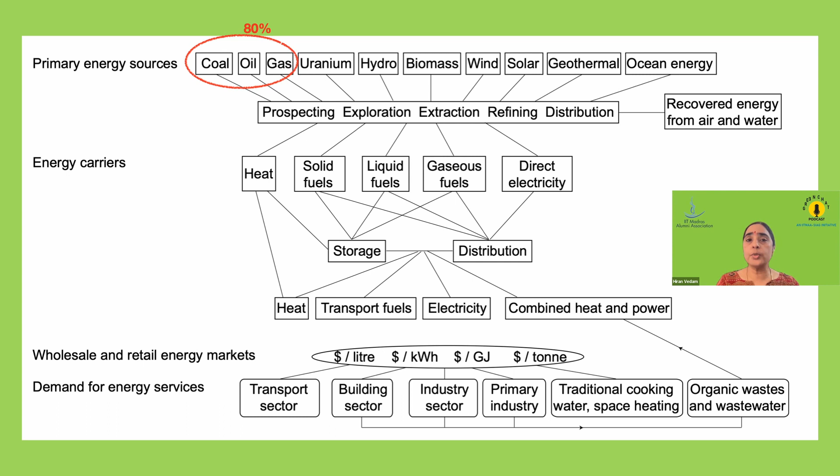So if you look at how this energy is distributed, 80% of the energy we use today comes from fossil fuels, and we touched upon it. We discussed it a lot in episode 2, and 6% of it is from biomass, directly the agricultural waste or plant waste and so on. And the rest of it, a very small portion of it, comes from solar and wind currently, but we hope this will grow for various reasons that will become apparent in this session as we go along.

And when we talk of energy, most people think about electricity, and most of the discussion around energy is around electricity, its transmission, its use, and so on. But it only contributes to 43% of our energy needs. The rest is gases, liquids, and solids like coal, gas, and oil, and also hydrogen kind of gases that we can store the primary energy and use it for later. Because it's easier to transport over pipelines, or we can store it for a long time without degradation and so on. That was good, Hiran.

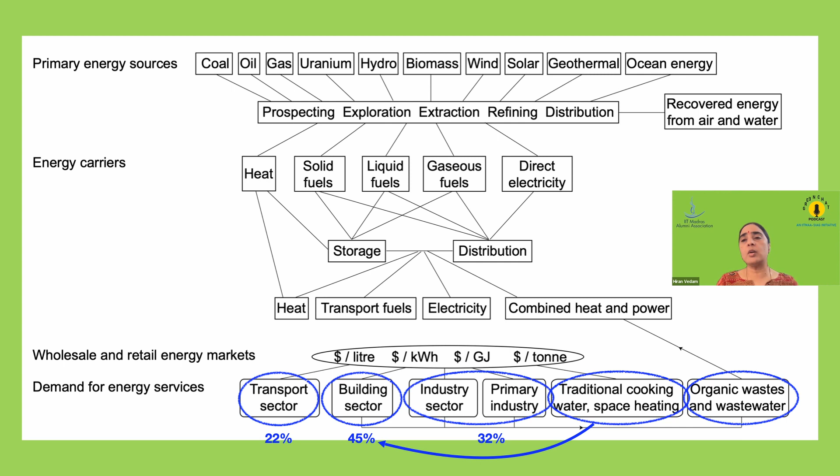What is the current and future demand of energy? If you look at the demand side of things, transportation, which includes your road, rail, your aviation, your seafaring vehicles, that accounts for about 22% of our energy use. Building sector, including our traditional cooking, space heating, and all of that, accounts for 45%. And the industry, including your waste treatment and all of that, accounts for 32% of it. So this is how the energy industry is structured overall.

And if you look at the primary consumption of energy world over, we are close to about 160 petawatt hours of energy that we use today. But it is expected to grow as GDP grows, in line with it. We expect it to grow at the 3 to 5% rate that we are seeing today.

Wonderful, Hiran. It's interesting to see that only 43% of energy is from electricity, and that's a big know-how that we have learned today. Now let's focus a little bit on what are the losses that are involved in every stage. You've mentioned all these phases. I'm sure there's energy losses across every phase. Let's talk about that. Sure.

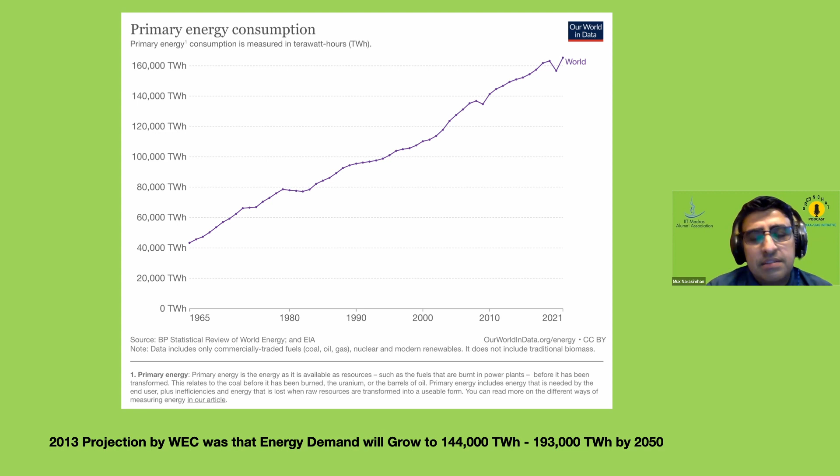As we all know, we need to convert energy from one form to another to use it, and we transmit energy from one point to another. So at every stage, when we are converting from primary to secondary, or whether you're transmitting it, or whether you're using it in a device, at each stage there are losses, inefficiencies in terms of transmission or transformation or in usage. So, for example, if we take coal, 1 unit of energy in coal, when it translates into the light in your light bulb, only 1.6% of that energy is actually generating that light. Everything else is lost either in transmission or in heating the bulb, so to speak.

So the useful energy is only 1.6%. That's extremely low. And not only that, if you look at the transmission losses, it accounts for more than 50% of the electricity generated. So you take coal, you convert it into electricity in your power plant. By the time it reaches your home, 50% of that energy is already lost.

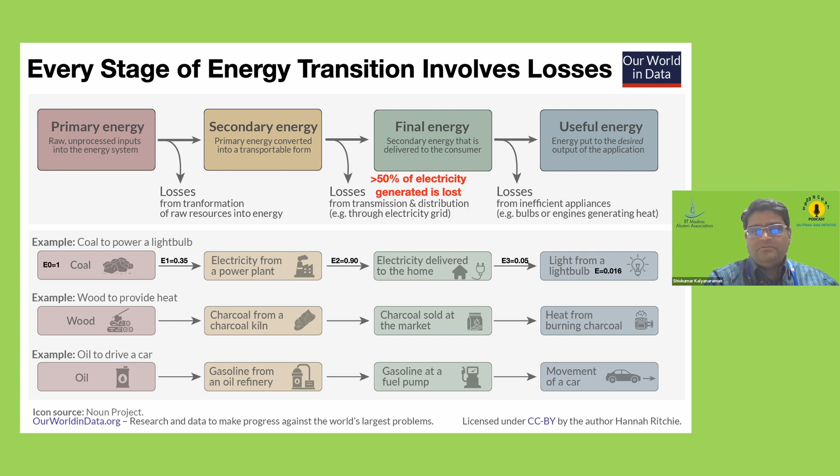So if you look at the technical loss versus commercial loss, I think you're including the commercial loss on this. The technical loss would be around 3.5-4% only, but the commercial loss is much higher. I agree with you. And is that an India phenomenon? No, this greater than 50% is actually a number from the global data from IEA. So this is not just an India phenomenon. You see that everywhere. Oh, okay. I was under the impression that 50% included the first set of losses primarily. So 50% is a big number. Yeah. And which is where, I guess, we'll be talking more about it in episode 5.

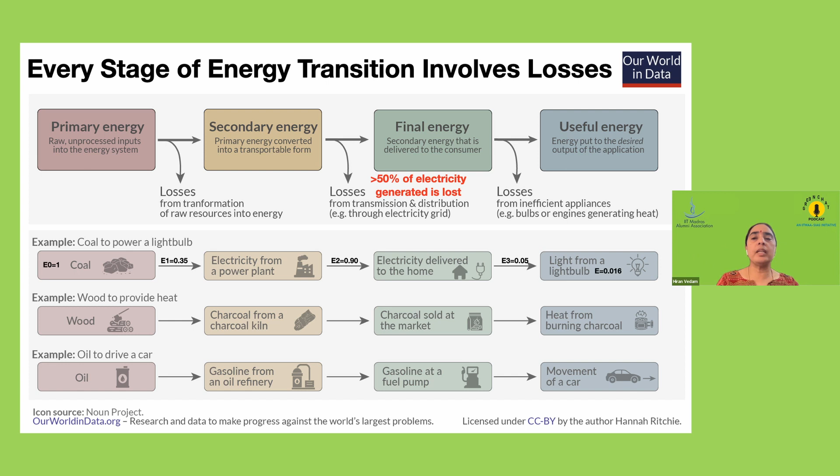Now, given the different choices of energy generation, what are some of the factors to consider? Now that we have so many different options for energy and energy generation, the next question becomes, how do we pick the right one? So one of the factors that we can look at is known as the capacity factor. It shows how efficiently we are using the energy source. It depends on the duration of operation, the availability of raw materials, and also the capacity of the grid to take the energy that's being generated.

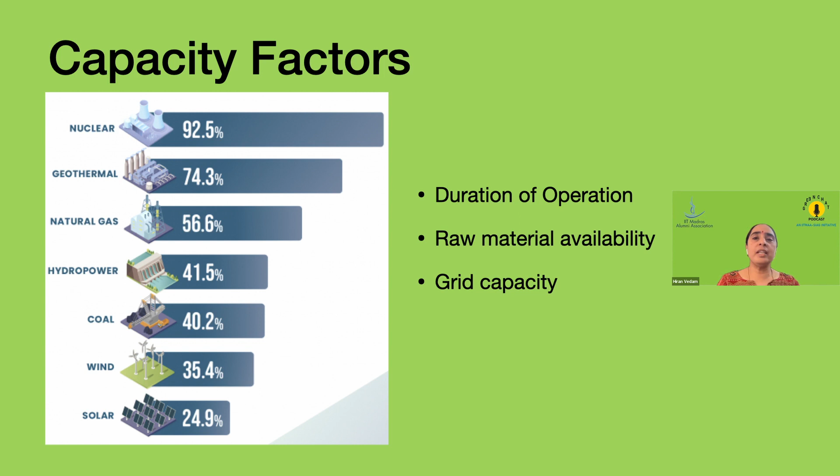So for example, you have intermittent sources like solar and wind. When they come online, you may not have the demand. And if the grid doesn't have enough capacity, then you have to shut down those plants. And this leads to lower capacity factors for wind and solar compared to nuclear that can run 24/7 because it doesn't require any new raw material to be added on a daily basis, and it can run continuously without interruption.

Correct. I think this is an area that we'll delve much deeper into in episode 5, along with our colleague, Dr. Shivakumar Kalyanaraman. So let's proceed to the next slide, where we're going to talk more about the safety aspect as well as the cleanliness aspect of the various sources.

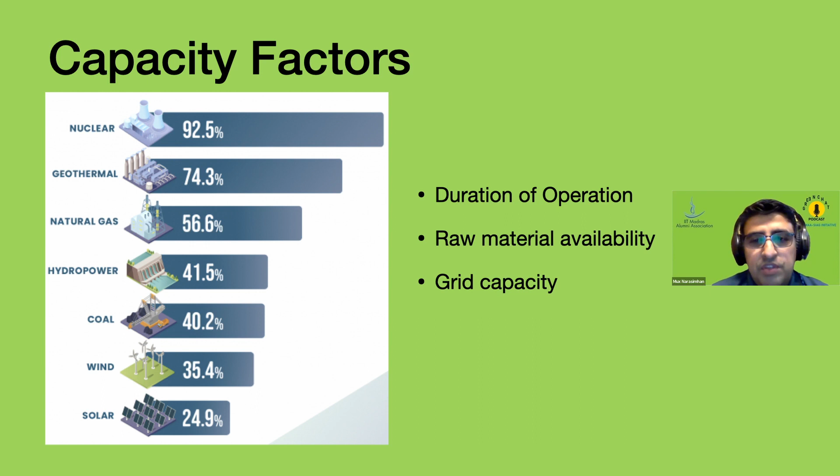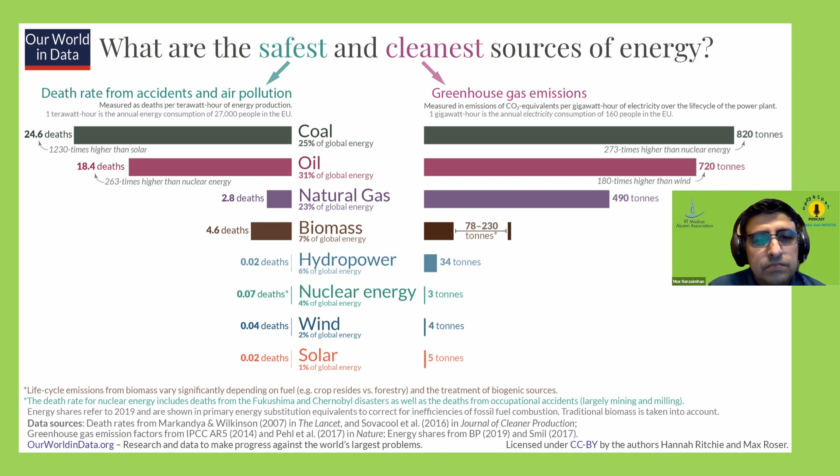The greenhouse emissions rate you're showing is for the EU. What about the rest of the world? Won't it be very different? Greenhouse gas emissions aren't actually the same in every part of the world, depending on where the units are being manufactured, where the energy is being produced, where the raw materials are coming in, and so on. There is a significant variation in the life cycle greenhouse gas emissions for each of these technologies. But even considering that, on average, you will see the renewable sources having much lower greenhouse gas emissions compared to the traditional sources.

Yeah, so basically you've got the transportation costs, you've got cost of production depending on where it's being produced. Hence, you've got pollution that's coming in because of transportation as well, adding to the greenhouse gases, etc. Right. How you're transporting it, whether you're using electric vehicles or traditional ICE-based vehicles to transport it, all of this matters.

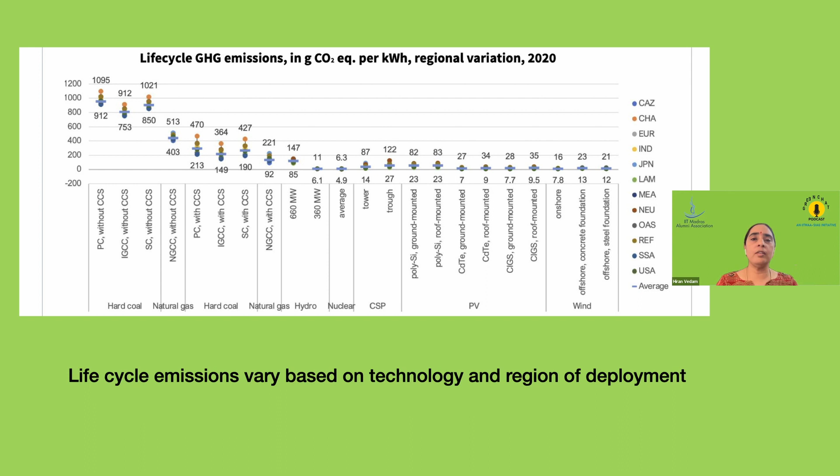So moving on, the other way to compare these energy sources is to look at the efficiencies. Large hydro plants are very efficient in generating electricity because you can take the potential energy from the water that's coming in and convert most of it to electricity. But large hydroelectricity projects have large negative externalities in terms of the environmental consequences and the social consequences.

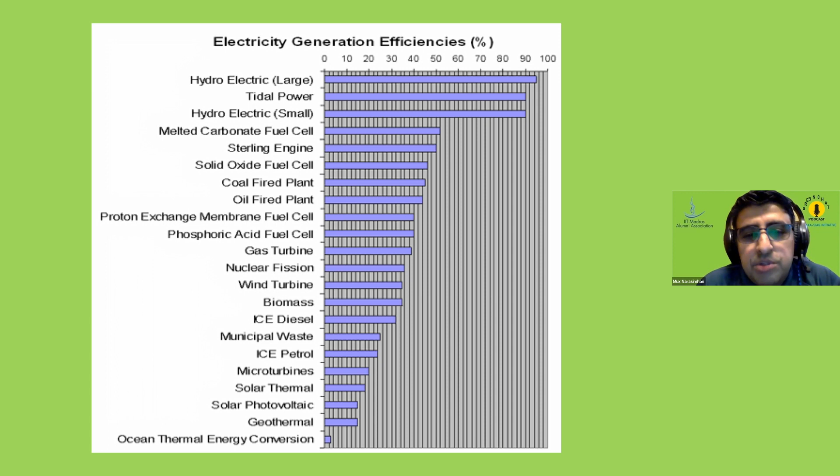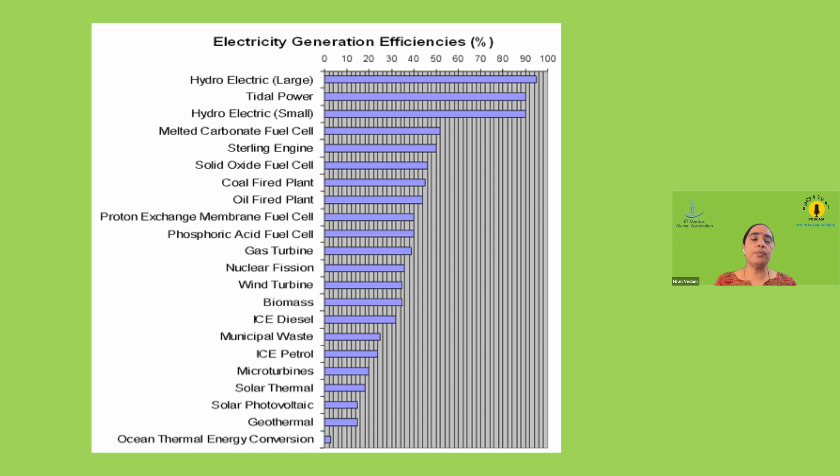On the other hand, solar photovoltaics have much lower efficiencies. The best efficiencies are, max, around 20 to 25%? We're at 25%. Cell efficiency around 26%, and module efficiency around 22%. Yeah, so around that kind of efficiency, but they don't have so many negative externalities compared to the hydroelectric projects, right? So with so many factors, how do we do an apples to apples comparison? Putting it all together, we need some way to put them all together, right? And that's where the industry uses something called the levelized cost of electricity.

So this takes into consideration your efficiency of conversion, your capex, your opex, all the other factors, your capacity utilization, all of these, and gives you a range of numbers as to what it would cost per unit of electricity generated using this technology, using the various options we've been looking at. And it varies widely because it is based on where it is located, how it is being used, and so on. Yeah, it makes sense.

The levelized cost of electricity takes into account not just the upfront cost, but also the operational cost of running the power plant over time, right? And also, I am not sure if it takes into account the recycling cost towards the end. It needs to, but those are some things that need to be updated. Right. Yeah, I think currently they don't. We have to include them.

So I think that's a lot of discussion on the generation side. And now let's look at, we have intermittent sources now. It's clear that solar is at 25%, wind is at 30%. If you want to pump in more solar and wind into the grid, what we need to do is also couple them with storage. So let's look at a few storage options from a technology standpoint, and how do we kind of measure one versus the other?

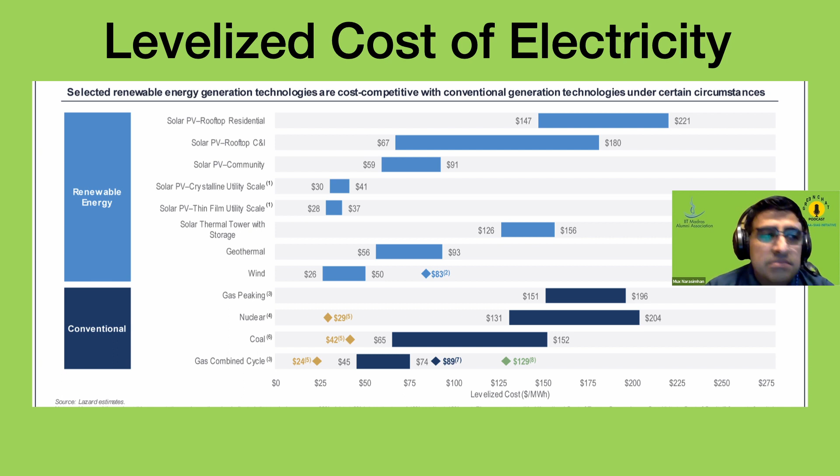Yeah, sure. So there are a wide variety of energy storage technologies. Some of these we know and we have used for a very long time. Some of them are newer, like flywheels and pumped hydro. To an extent, we have used them. I mean, the large hydro dams are all gravity-based systems. But now we are looking at much smaller scale systems.

Then you have the electrochemical based storages, a variety of battery technologies or flow batteries. You can store it as hydrogen. You can convert the electricity generated into hydrogen using a PEM electrolyzer or an alkaline electrolyzer, and store the hydrogen. And once you convert it, hydrogen can be stored for as long as you want without any degradation. And that's the biggest advantage of something like hydrogen, because if you store energy in a battery, we know over time that you lose that energy that is stored.

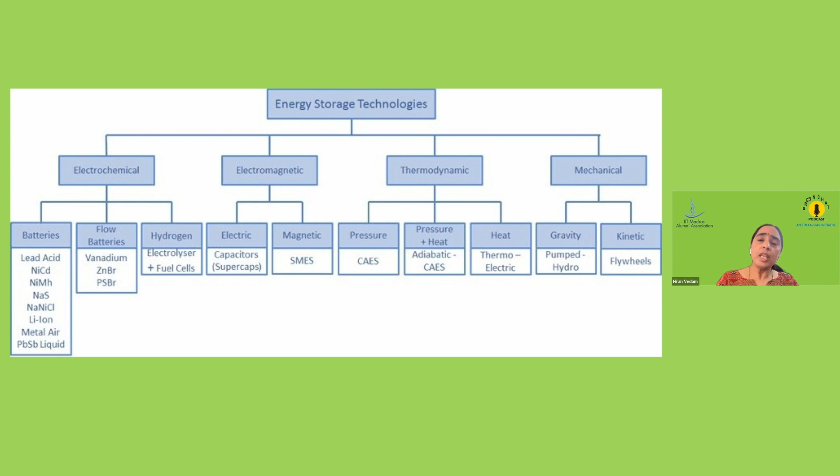Yeah. Then you have super caps that you can use for short-term storage of smaller quantities of energy, or you can use thermal. I mean, you don't always need to store energy in the form of electricity. You can store it directly as heat or as high pressure systems that can release the energy when you need it. Or gravity based, you can have these concrete blocks that you can raise up and convert the energy into potential energy that you can use. So all these options are available. The question becomes, what's appropriate when?

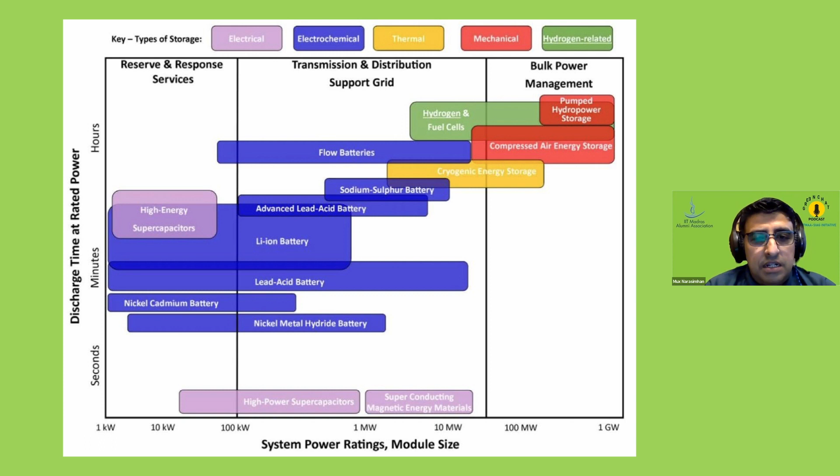Yeah. So if you look at it, it's not a one size fits all. So that's what I think we should talk about next, which fits better in what sort of environment. Right. So now we've seen that we have a variety of options. So which one do you pick? And it really depends on what is the power rating of the system we are talking about, how long do you want to store it, and how fast you want to access that energy.

Okay, so if you're talking about something like pumped hydro or compressed air storage, it would take you hours to get that energy back when you need to use it. If you're using super caps, you can quickly get the energy you need from the storage. Lithium ion or lead acid batteries, flow batteries, these have different time scales. Lithium ion batteries are really ideal for smaller scale, like the single megawatt kind of range. But if you need even higher capacity, then you go for something like a flow battery or hydrogen fuel cells, hydrogen based storage, and so on.

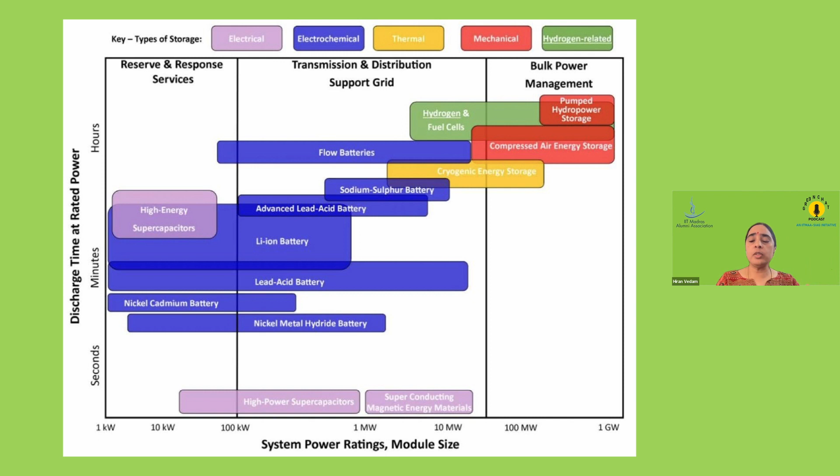Another factor that contributes, in addition to the time of discharge and the amount of power, is the round trip efficiency. We said that every time there is an energy conversion, there is some loss. And what is the round trip efficiency you can get from generation to storage and back when you need it? These vary from as high as 85% for pumped hydro to below 50% for hydrogen, with other technologies somewhere in between.

So we've got a variety now of storage options that we can evaluate based on maximum power rating, discharge time, how many cycles you can use, what is the lifetime, what is the charge density or the energy density, and what is the efficiency of the conversion back and forth, right? So using these, we can make intelligent choices. Maybe it leads to some more optimization on which technology is being used for what applications and where, at what price points.

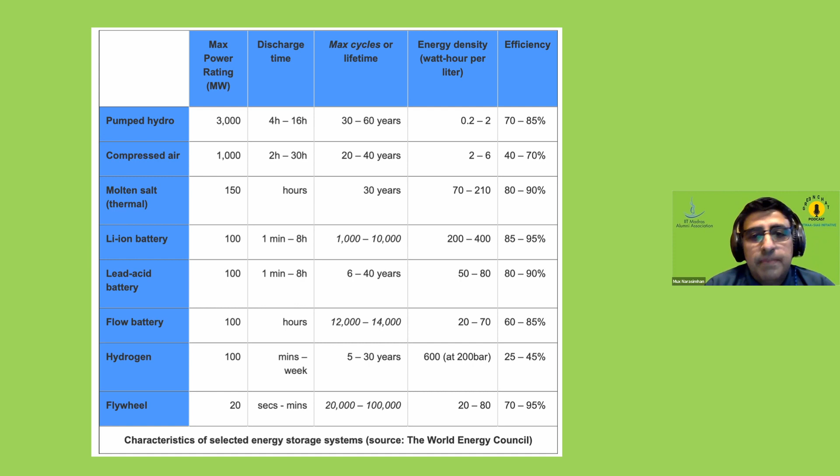So now we should also talk about the price, which is also important. As you're saying, solar is very cheap, but when you add storage to it, it becomes more expensive. So maybe we should talk about some kind of a cost value for these various options and evaluate it on a levelized cost kind of basis. Go ahead. Right. So similar to what we've done with the levelized cost of electricity, we can also do a levelized cost of storage.

And again, depending on which point you're using the storage for, what kind of capacity you're using it for, there is a range. And one thing to note is that the same LFP battery storage may have a different levelized cost of storage when you're using it for wholesale storage versus in transmission and distribution, or at your commercial or industrial scale, because the way they scale is not always linear. Correct. It's economies of scale, right?

So packaging costs, etc., will be different for a megawatt-scale plant versus a 10 kilowatt or a 50 kilowatt plant. Right. So none of these scale linearly, and there are some fixed costs each one comes with. So that's why the same technology will have different costs depending on where you're using it, which application you're putting it for. Hiran, in terms of different applications, the same battery costs differently.

Maybe it's also interesting to mention that these costs are not fixed over time, right? They tend to trend downwards, and some of them fall faster based on learning curves and deployment. Would you like to comment on that? Right. In fact, storage costs as well as solar and renewable energy costs have been coming down over the years. Now, if you compare solar versus traditional energy sources, solar and wind are cost competitive for most of the applications.

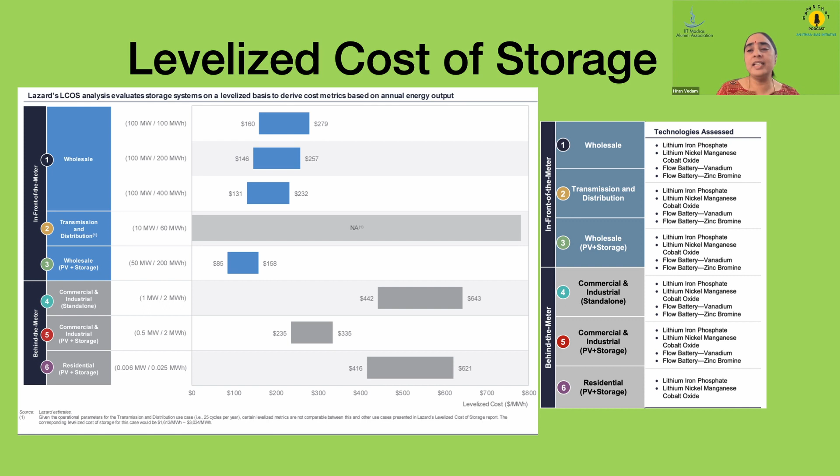But every new battery technology takes a long time to come to market. Generally, people tend to underestimate how long it takes for a new battery technology to come into the market and scale, and that's why some of these newer technologies will take time. Yeah, and just to add a couple of points, one of the key areas of storage, as Hiran pointed out, is not just batteries but hydrogen. And that can be heavily localized. Other than the membrane itself, a lot of the components can be localized. Even the membrane, India could make eventually.

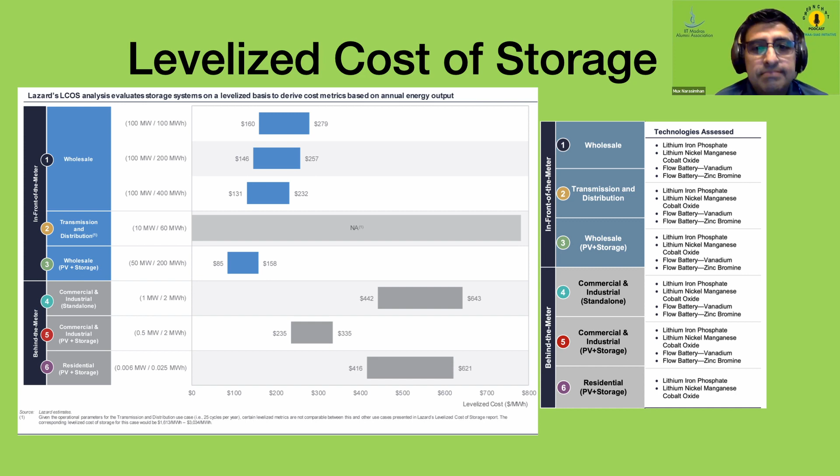But the key is, if you have existing pipelines being used for natural gas, the same pipeline can be used up to 4% for hydrogen as well, and that mix is improving the natural gas yield, and there are a lot of improvements happening in that area. So we should not forget other localizable methods of storage. That way you can maintain Atmanirbhar and, as Shiv pointed out, inflation-ready solutions that don't pinch the pocket.

So fantastic. I think we've come to a logical end for episode 4, where we talked about the generation and storage aspects of energy, mostly electricity, which we learned was 43%. In the next episode, episode 5, we will delve deeper into the supply chain aspects of energy, primarily supply and demand, the mismatch, etc.